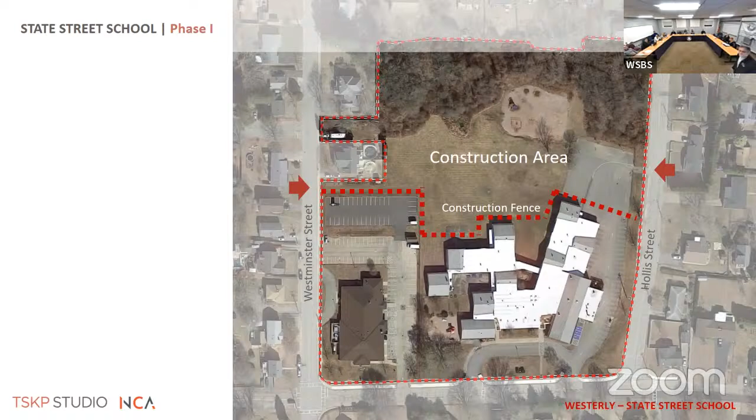This is a picture taken from here looking back, and you can see the auger that they use. They go down about 10 feet or so.

It's a delegated design, so the ground improvement contractor has a geotechnical consultant on their team. Our design engineer, the structural engineer, gives them the criteria they need to meet. They come up with a layout plan for where all these piers are going to go, and the depth that they need to be.

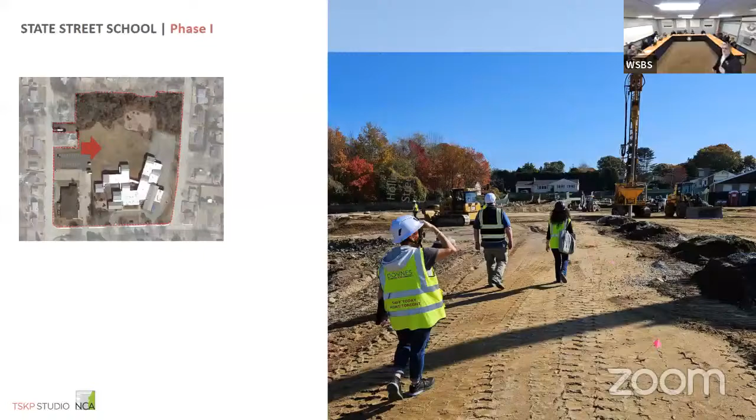The process is they go in, they auger down—the auger is about 30 inch, yeah, 30 inch, goes down pretty quickly. If you go to the next slide—that's right, yeah, we feel it.

Here's a picture closer up, looking, and you can kind of see the cut. The school is just on the other side of this fence, and that's what we're calling subgrade—basically the elevation of the foundations that are going in.

We knew the site was bad everywhere. Initially, back in SD, the plan was to take out all the bad material, go down 10 feet, and bring it back up. Instead, the design was to just go down to bottom footing elevation to get a nice clean pad, so the ground improvement company could come in, put in all their piles, and we'll sit on those piles and go up from there. So that's what you're seeing here—basically the cut that is across the whole site now.

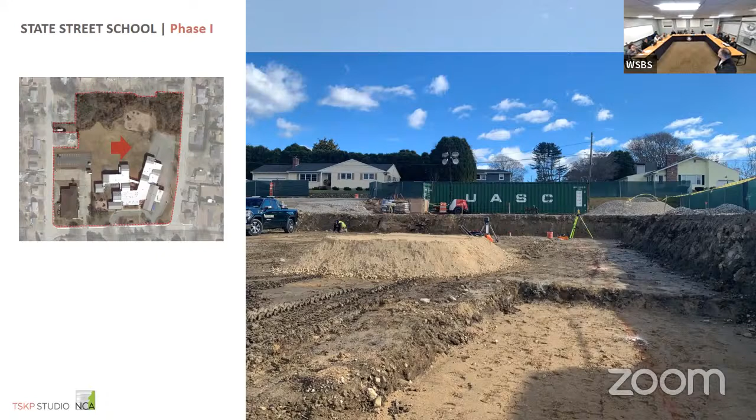And for the next one—here you can see the full operation. The auger digs a hole, and then this thing right here comes and fills it with the aggregate. They back up with a truck, dump it in, and fill it, so it basically becomes a column in the ground made up of crushed stone.

So it's almost like piles—the building is sitting on all these stone piers set in the ground, and there's a lot of them. It's 670, yeah, it's a lot.

Your students built every one of those. Yeah, but they also think that is the coolest thing ever. It is pretty cool.

So they did hit a fair amount of rock here and there. Anything, say maybe a foot or smaller in diameter, the auger just pulls it right out. If it's bigger, and they hit it and it doesn't just come out, they got to go down and dig it out.

So we are looking at a change order that we've been tracking. We'll have that for the next building committee meeting. That work is done. It's not going to be a crazy amount of money, but it's always unfortunate to have change orders.

Although, you probably heard this from Ashley, but once you're getting out, the ground is one of your biggest risks. Once you get out of the ground, that's a huge milestone that's behind you, and that risk is behind you. And then they become smaller. Other things will bite you later on, but the ground is a big one. So we're pretty much out of the ground right now in terms of the major risk.

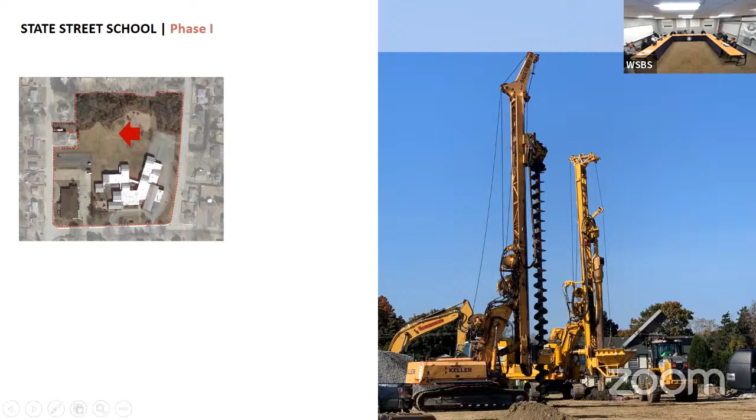Anything else? It's too bad we didn't do wetlands flagging. Exactly. We have been in a severe drought, but we still are historically high for our rainfall for the year, which tells you everything you need to know about how wet the spring and summer was, which is when we were. Everything was wet.

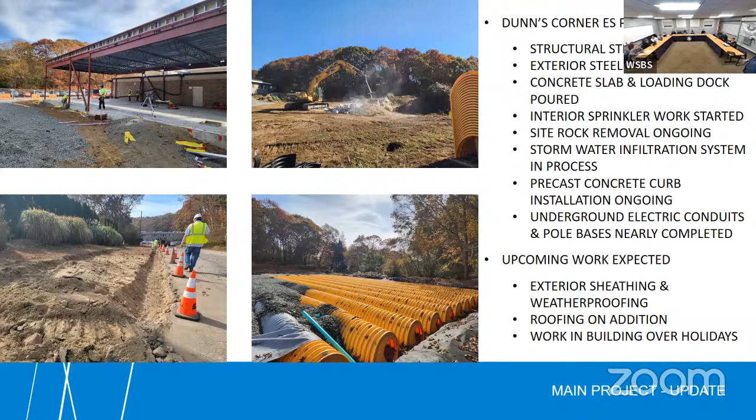One thing I want to add, which I mentioned at Dunn's: here the sprinkler work is basically complete until summer, when they get the water line and fire pumps in. At Dunn's Corner, they're now starting second shift work and will continue for the next few months while they complete work above the ceiling.

So I'd like to present to you about change order 5.

Can I back up on the second shift work? How's that working operationally with the district? Does somebody need to be there? Somebody needs to be there, but they're already there, so we're not putting any additional staff in the school. Second shift runs until about 11 o'clock, and it's been coordinated with Mark, who it's working out very well with.

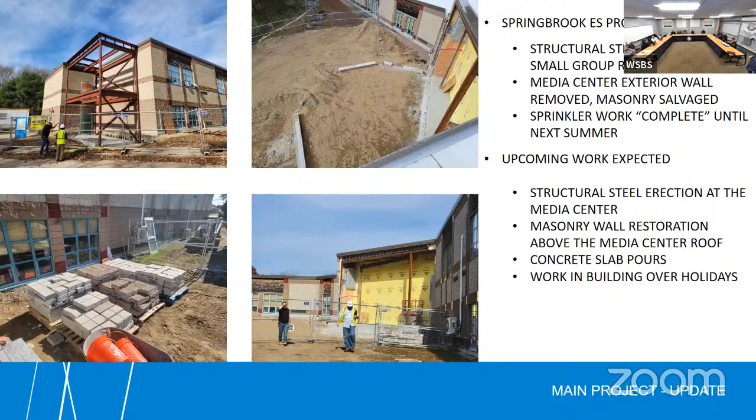Because the more we can do on those holidays, the less cramped the summer will be, because the second summer is always going to be the critical one.

So change order 5 has some items on here. The first item is the reformed sidewalks, specifically for the walk in the gymnasium. The walk out of the gym door did not provide the handicap landing outside the door. We caught that the day after, unfortunately, after they poured. So there's some work to fix the sidewalk and reconfigure that.

Consequently, the next change order, 31R2, is for this area. There were a couple other doors they weren't planning on doing, so we had to get them to change the pitch of all the sidewalks and everything with that. Then the secondary duct bank—what you see in the bottom left is the electric coming from the transformer towards the building. We showed the conduit staying shallow and going into the building in several locations. The way the contractor wants to feed his electrical gear, he wants to come in this kind of tower or column of conduits into the building and then into the gear directly that way. So it's a change in scope of work. Because of what we're doing there, we're adding some waterproofing to make sure it's a watertight installation.

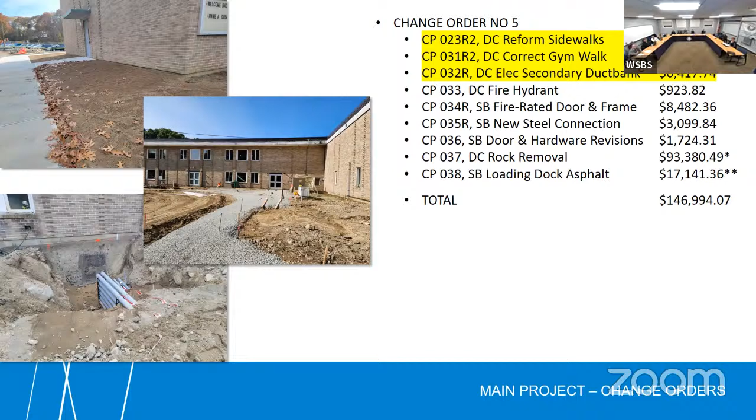For the second group of changes here, the fire hydrant—we had added a fire hydrant at Dunn's Corner that wasn't shown on the bid drawings. They started putting in the work for the hydrant, and then the fire department said they don't need it anymore. So unfortunately, we would have owned the change order regardless because we added it in. But the only work that they did was put in an elbow and a couple pieces of concrete, so that's why it's only $900. In the future, you could put one there if you wanted to. The fire department didn't want to because they get charged for every fire hydrant they have in the town. The town charges the fire department, and they determined they didn't need one over here. It's amazing how negotiable that is.

Bottom left is the Springbrook fire rated door and frame. We're finding out, and we've discussed this with Mark McKinnon, that this water fire room, based on the equipment being submitted, is not large enough. The reason we picked this wall location was to maintain the sound system in here, and there's a gas pipe right here. What we're doing right now is proposing to eliminate that wall to give them more room and make these doors fire rated. They'll still have access to the sound system, but it'll be going into the fire pump room. They just needed more room to work around and service all the equipment in there. So that's a change order.

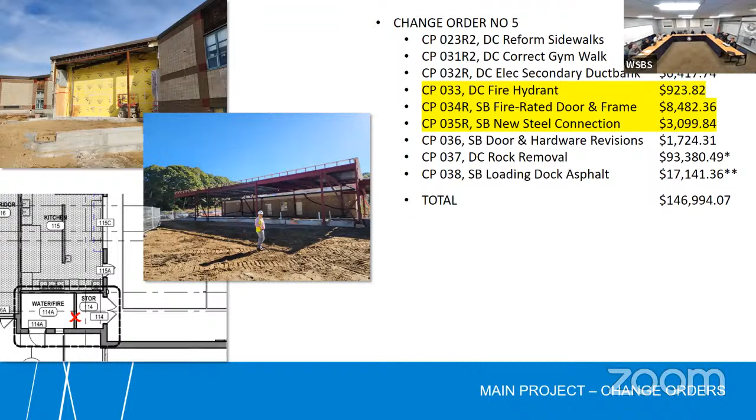Here's the rock. Where do I begin on this? I'll start by saying your architect is here for scale compared to the size of some of these rocks that we pulled out. We wound up encountering about 320 cubic yards of rock. The excavation of the whole area—the amount of rock was about 20% of that entire excavation for the stormwater system, just the amount of boulders. Just for behind the building, not what we already took out in the front. Correct. So what I'm noting here is that we have a unit price that was submitted in the bids, $375 a cubic yard to remove rock.

So that's times the 320, we've done some negotiation. And I wanted to note that so far this project has taken care of $204,000 worth of rock and soil through base bid allowances. So we had accommodations for a lot of this rock. It's exceeded anything that we could have possibly anticipated.

We wouldn't have expected 20% of that excavation to be boulders, not based on the geotech report that we received. For just real quick, I'm going to interrupt.

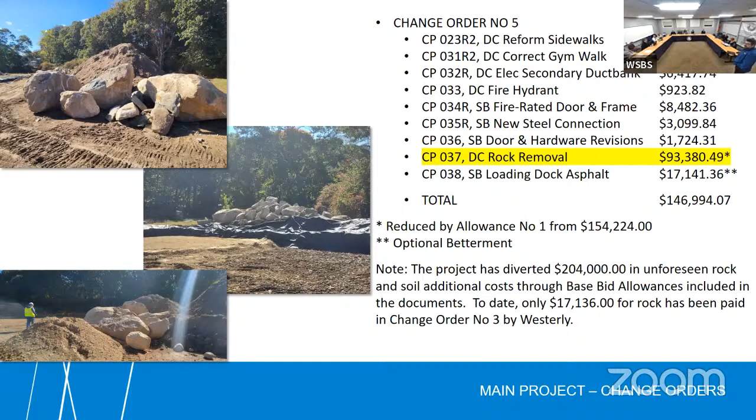The last one is something we talked about with Mark McKinnon. We were standing up on the roof of Springbrook, and I looked down. This is a picture from 2023, for the loading dock asphalt area, and what you see is a lot of cracks here, a lot of it broken up. It's actually gotten worse in the last year. We're putting about a 5-foot trench right through this for the water line to get into the building right here.

And I said, why are we patching an asphalt area that is pretty dilapidated?

We're not doing any other paving work on the rest of the site, which is the reason we didn't address it. But we said, let's get a price for it and then bring it to the committee. It is optional, you could just put in the patch and leave it, but we wanted to give you guys the option at 17,000. That works out to about $13 a square foot.

How far out is it? It comes out to the edge of the curb line, which is like out here somewhere. Yeah, so wherever the curb connects along, that's what it comes out to.

Do we have newer dumpsters? Well, that's part of it. We can get rid of the staging of the dumpsters.

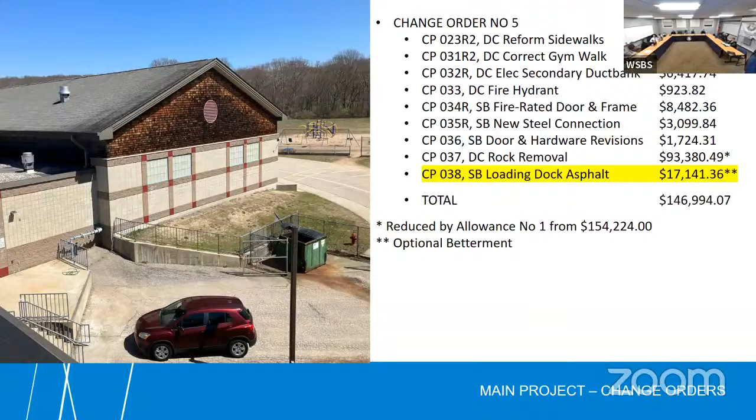So a couple quick items on the roof. We finally did a punch list on the 31st. Garland also did their inspection. We are waiting for them to repair the items and say that everything's complete so we can back inspect. As soon as Garland issues their sign off and warranty, we will issue substantial completion. We're there, we're just waiting on Garland to be ready to say it's done. Soon as we're at that point, we'll issue substantial completion, so the warranty will start.

The back of the cupola still needs to have a louver put in. That's on back order right now, so they're working on that. They still have to paint the trim and the louvers around on the front of the cupola. And then we're adding, we had in the base bid snow protection above all the doors, so we don't get sliding snow off the roof. There's some things that they have to do on the building, and we're hoping they'll do that in the next few weeks, because the time's ticking now that we've done the punch list.

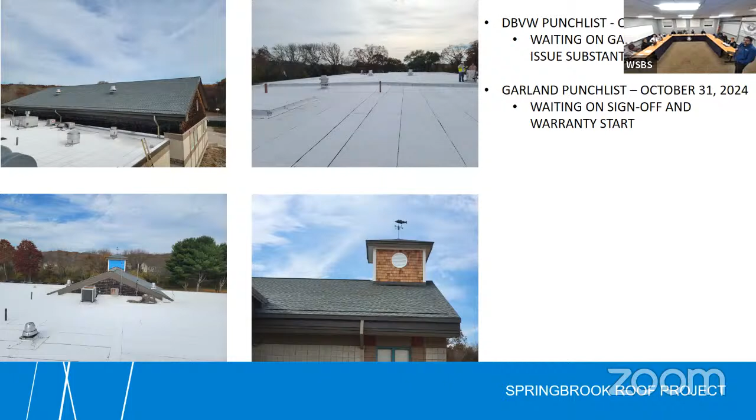And one last thing on that is we've had zero change orders on the roof work. We haven't had to process anything. When we were going up to the roof, I think it was someone, Eric from Downs, saw this.

About early October, the gap between the existing masonry and the metalwork, this has existed the way it is for a while now. This is basically an open gap into the cavity. Mark does have work on his new capital plan to do sealant and repair work. But since we have a contractor here that's capable of doing masonry and sealant, we wanted to give you guys the option.

We've just sent out a proposal request for this work to get a cost in. I didn't know if this committee would want to entertain a not to exceed number so that we could get this work done. Which contractor did this go to? This would go to commercial roofing. So it's not part of the bond. This is part of the roof project.

The other option is that we defer this work. It's on the list. We finish closing out the roof work, and then whatever money's left gets processed back. The longer you wait, the more chance of... yeah, there is an air barrier behind this, but we don't know the condition of it, so it is allowing water to get into the cavity, but it has a way to get out.

What's the cost to address that? I was going to recommend a not to exceed of 25,000.

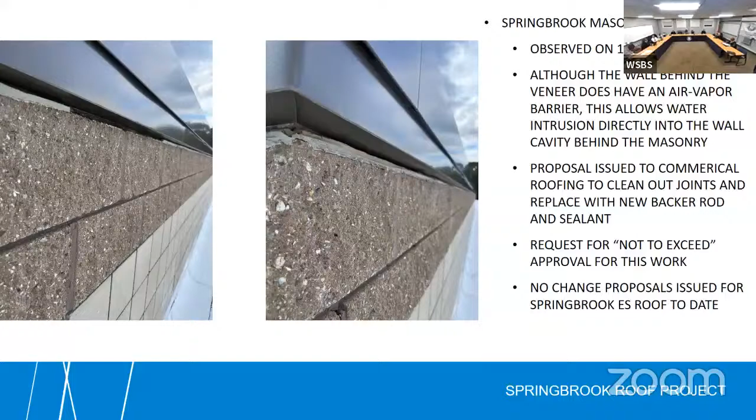I'll move not to exceed the number 25,000. Second. Any further discussion? All those in favor? Aye. Any opposed? No. Okay, that's all I have. Thank you.

Okay, so anything else, Deb, that you can think of regarding OPM or architect update? The only other question I got from a couple, I just came to these conferences.

Is there an idea of how long that work will be going on with the rocks? I know after this discussion rocks might be a bit of an issue, but there was just a discussion it's really loud when they were jackhammering it - very loud for about a week and a half.

Right now we still have the septic to put in. They haven't really identified, because the subcontractor hasn't told them, when they want to work. If we get a mild winter, they might work right through and get that thing done. Or it might wait till spring, or summer. We're not sure when they're doing it yet.

But the good thing is, the right answer to tell them is August, September of 25 - that's when all the work is done, but it probably won't be consistent throughout the whole year. No, no, no, yeah, no.

I think that's the right way to put it - they'll pull some rock out, break it up, move it, and then it might be a week or so later, they'll break it up again, move it.

We are optimistic - let me, I wish I was still standing, I'm sorry. We are optimistic that some of the septic tanks near the building are within the zone of the original construction, so there wouldn't be these gigantic boulders in that area. We're optimistic, but not guaranteed though.